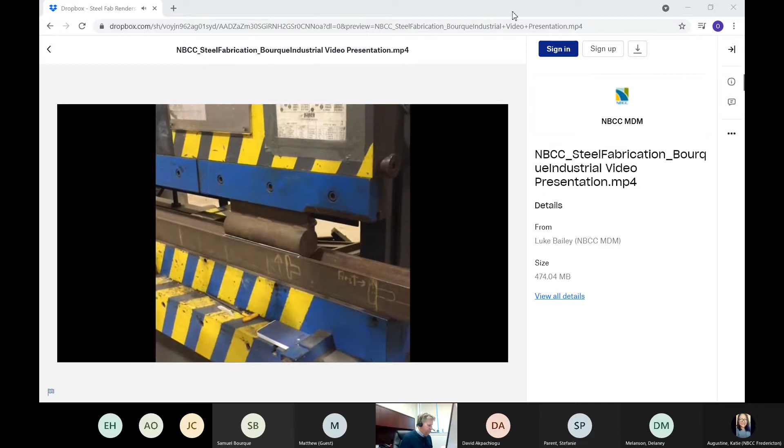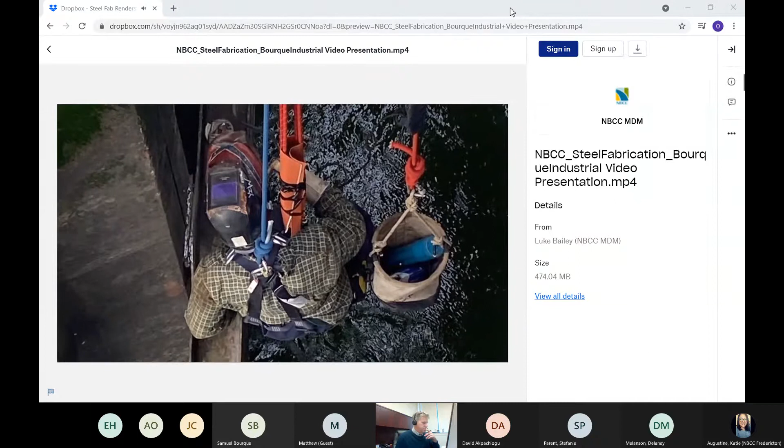Al, yep, there's no sound from the video. I'm not sure if you got my message in the chat. I don't know why. Did you unplug your headphone maybe? Just while the video is playing, just try that. No? Just provided by the college.

Okay, now it sounded like we had a little bit of a sound problem in there. Is that true? There was a little bit of sound coming through for a second. Not sure if it was when you unplugged your headphones or just toward the end of it. Yeah, towards the end, that probably was it. My headphones are probably interfering with that. So what was the first video like, was there sound or no? No sound at all. Okay, so I wonder if I should just play that first video again because I want to talk about that a bit. Okay, we'll try and unplug and see if we can get it to go. Yeah, let's try that. I'm just going to turn up my own volume here as well, see if we can't do this.

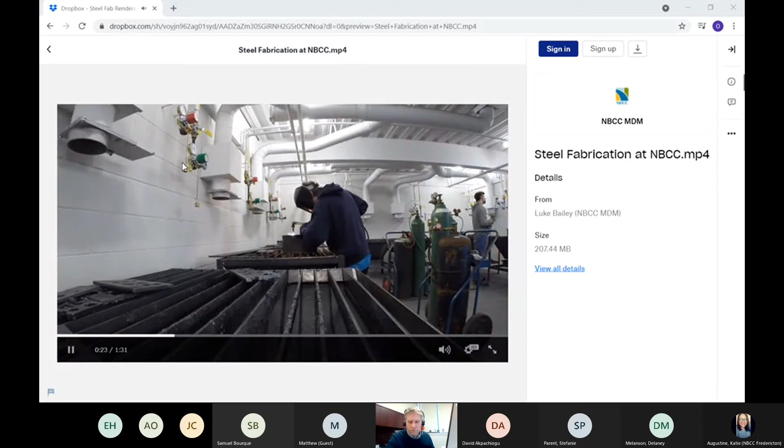Still no sound, Al? No sound? No. I guess we're not going to get that sound, but at least you saw a little bit of a pictorial of what's going on there.

So I'm just going to move over to a little PowerPoint presentation, and we're going to talk a bit about each program, which I think will be okay. And then we can start discussing any questions you might have.

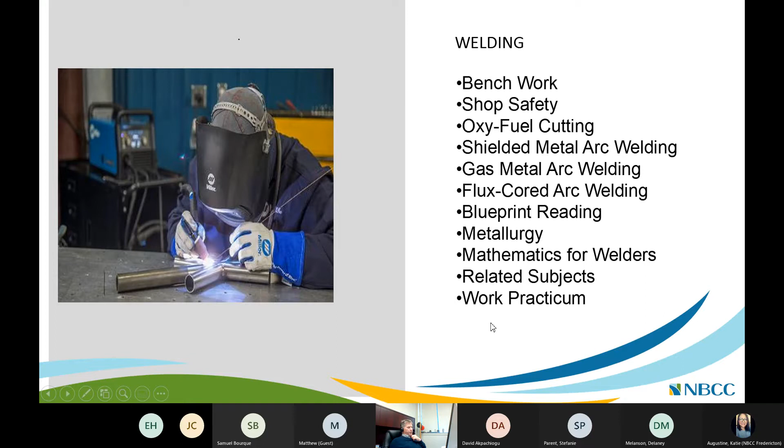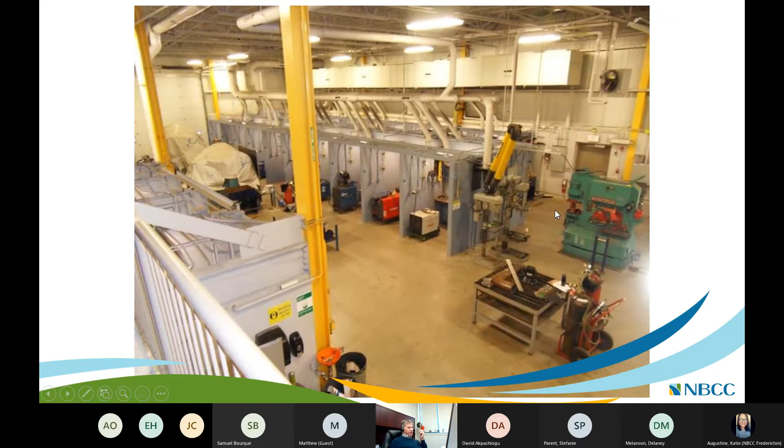You see in this shop there are a few tools around. This little green thing on the right-hand side is called an iron worker, and it will punch holes and cut metal so that you can fabricate certain portions of what you might want to do. There's also metal working saws, punches, and band saws—all the equipment a welder needs to do the work required.

Related fairly closely to welding is Welder Metal Fabricator, offered at two campuses, Miramichi and Woodstock. These are a hybrid course that hits the middle ground between a pure metal or steel fabricator and a pure welder, so we do a lot of welding but also a lot of fabrication.

Some of the coursework is pretty similar, so I won't go over it again, but there's learning to weld, welding and cutting, material handling, fitting, blueprint reading with a bit more drafting in this one. Math is still there, along with workplace safety practices. At the end of the 1-year period there's a workplace practicum, leading to a graduation certificate and the potential to write your level 1 apprenticeship exam.

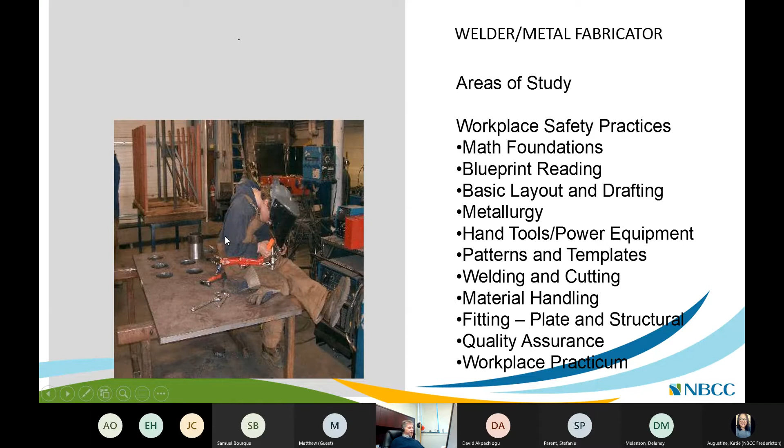In this picture, the fabricator has created a plate with some fairly large holes in it, with a piece of tubing coming out. That project was actually part of a Point Lepreau generating station mock-up we were asked to do a couple of years ago when Point Lepreau was refurbished. We did a fair bit of work for Point Lepreau out of the Moncton shop and the Saint John shop. What you see sticking out of that tube would actually be like a steam tube that would be inside that nuclear power plant. We really get into some interesting projects inside our coursework.

Just a quick look at steel fabrication, the third of the three related programs. We have welding, welder/metal fabricator, and then steel fabrication. Many of the courses are very similar in terms of blueprint reading, material preparation, mathematics, and welding courses, but this one is very heavy in fabrication equipment. Even though you didn't hear the sound in my little video at the start, there was quite a display of fabrication equipment that we utilize for our steel fabricators and welders.

What you saw in that video was a fairly large set of plate rolls, shears, machines that bend heavy metal, and machines that cut it. We also have a CNC cutting table that will process whatever you might like.

Steel fabricators would probably work on projects like shipbuilding. A lot would be employed, for example, down in the shipyards in Halifax, and many companies like Burke Industrial would hire a lot of our steel fabricators. So those are the three programs, and the flavor is slightly different between them, but they all work in the field of welding and fabrication.

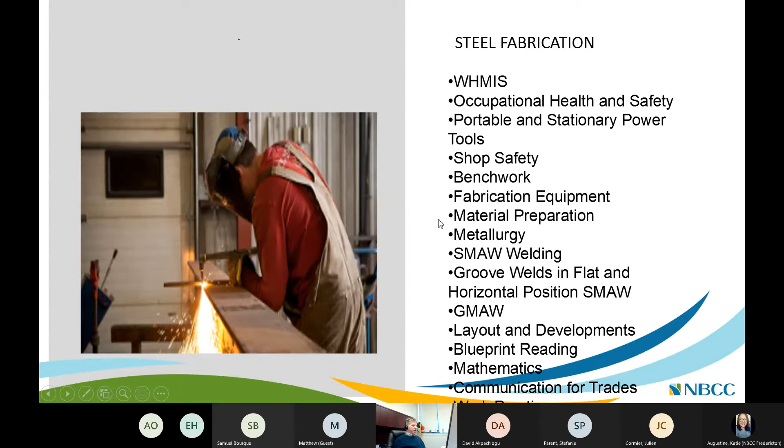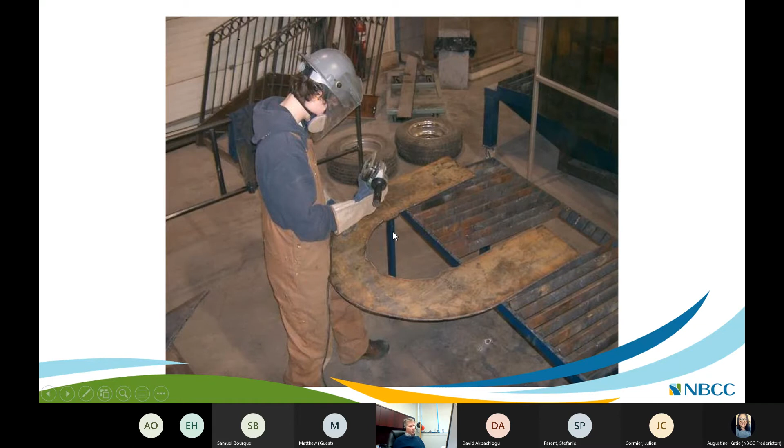Related to those three programs is another very fascinating 2-year program within the metals processing group: Welding Technology. It's 2 years in length, and the entrance requirements are a little different. Entrance requirements for our 1-year trades programs are by and large high school graduation with math at maybe the grade 10 level, but this one's different.

The entrance requirements are more towards an academic credential, so we would want Math 11A and B, I think, and an academic diploma, because this leads to certification as a welding engineering technologist, which is a very unique lifestyle and career.

The specialty in this area is really under welding inspection methods, which is the first course. It gets into non-destructive and destructive testing of metals. Under non-destructive testing, this program covers X-raying and ultrasonics, looking through metals to see if there are any flaws or problems within welds.

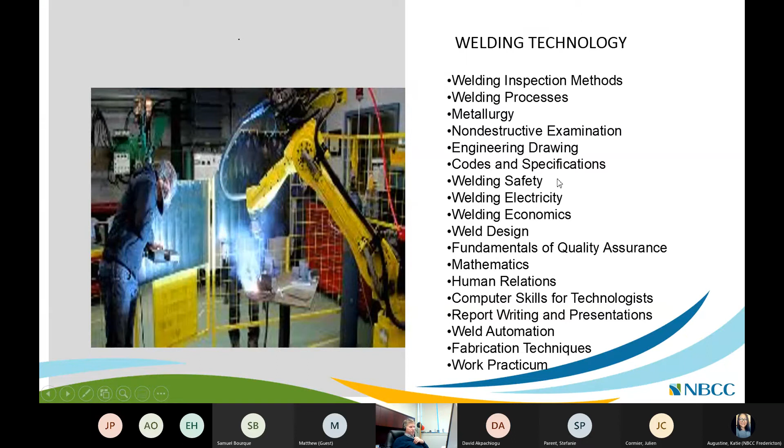Welding technologists are employed out of Moncton all over North America. So something interesting to look into if you're so interested.

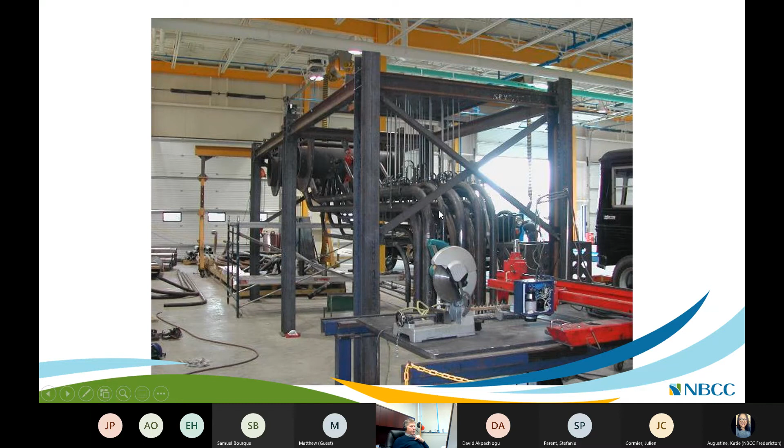Very interesting project for students. It took us about 6 months and involved all our fabricators, all our welders, and our welding technologists, who provided the overseeing of the whole project and all of the destructive and non-destructive testing that had to go on before we could release it. Neat stuff.

Students have to really learn a lot about precision, machining with precision, measuring with precision, and creating parts and pieces that fit into other parts and pieces with zero tolerance. So it's a pretty fascinating thing. The Machinist program is offered in Moncton and Saint John.

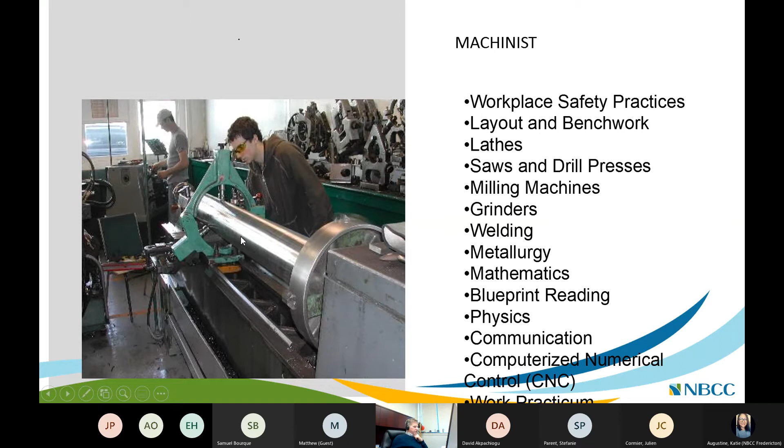Here's another shot of a so-called vertical mill. The last one was a horizontal lathe. This is a vertical mill, and you can see this student milling out a part using a sort of vertical tool to do that.

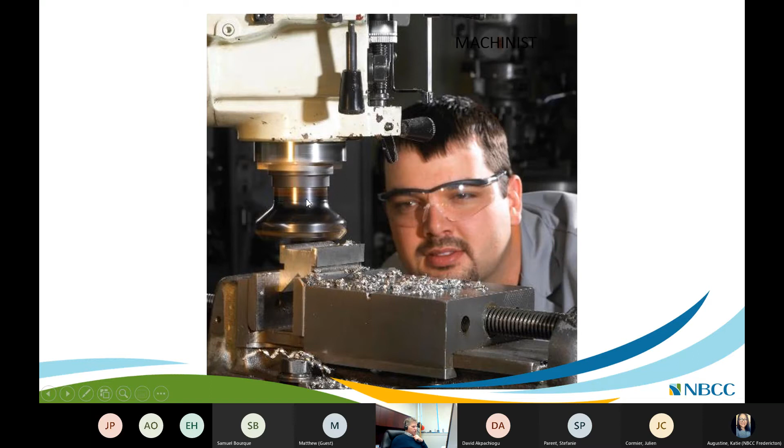From there, we move on to a CNC Machinist program. This one ends up being 2 years, because you have to do our 1-year program first before you can qualify to get into this. And this one is a total 180 degrees from what you just saw in terms of the manual types of machining that goes on.

These students spend 50% of their time learning three-dimensional programming software and 3D drawing software, shipping those programs off to one of our 10 machines, and then actually cutting the part simply by computer control. So this is a totally hands-off operation, and that machine in the background might be set up to run 3 or 4 different axes, so all the tooling would rotate around the part and would actually build it. It's a total departure from machining and well into the world of IT.

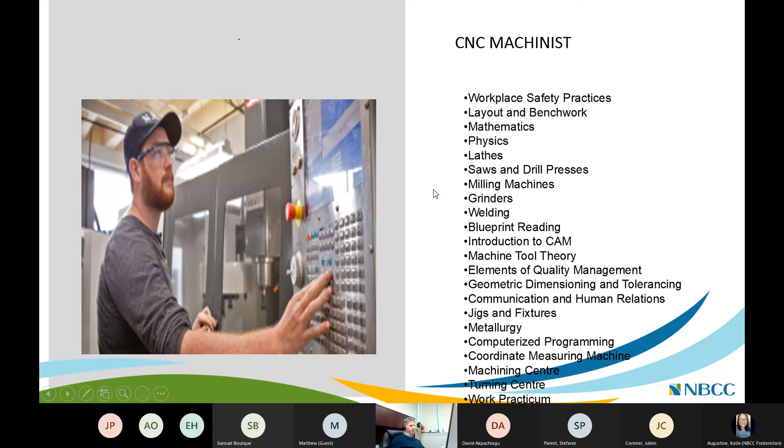So it really interests a lot of people, and the jobs here are just amazing for CNC specialists. New Brunswick, Nova Scotia, and PEI all come to this program for this workforce because there's a very large, believe it or not, aircraft parts manufacturing industry in all 3 provinces, and they rely on us to supply that workforce. So the jobs are there. All of our graduating classes out of this program are snatched up as soon as we can do it.

So again, here's a little bit of CNC. This is a program called Mastercam, and you can see they're developing some material so that it can be programmed in to build some of these pieces that you see on the screen.

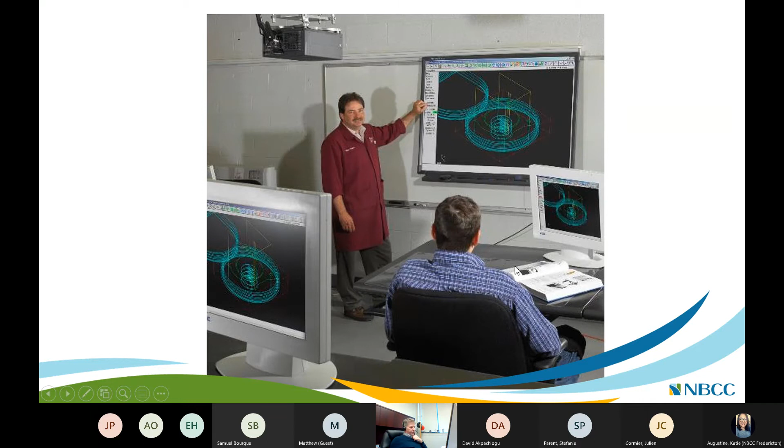So I said I'd talk a little bit about apprenticeship, and I'm going to do that, and then we'll entertain some questions.

Apprenticeship is the way that tradespeople get licensed. We like to call it around here the other 4-year degree, because you can take about 3 to 4 years after NBCC to actually become what's known as a red seal or licensed tradesperson. So at Moncton, we offer apprenticeship after the fact in welding, in machining, and in steel fabrication, and there are other apprenticeships around the province in things like sheet metal, carpentry, electrical, plumbing. All of those areas are apprenticeable trades.

Essentially, apprenticeship is a way of working and learning towards a master type of designation in the field of your choice.

Apprenticeship is generally described as you, or a person who wants to be apprenticed, working for a company, and then at some point during the first year being released to do about 6 to 8 weeks of schooling back at good old NBCC, and you write an exam. Then you go back for another year with the company, and you come back to NBCC and do another 6 to 8 weeks, depending on what your block is. You write an exam, then you go back to your company. Some trades run at 3 years of apprenticeship, some go 4, depending on how difficult they are.